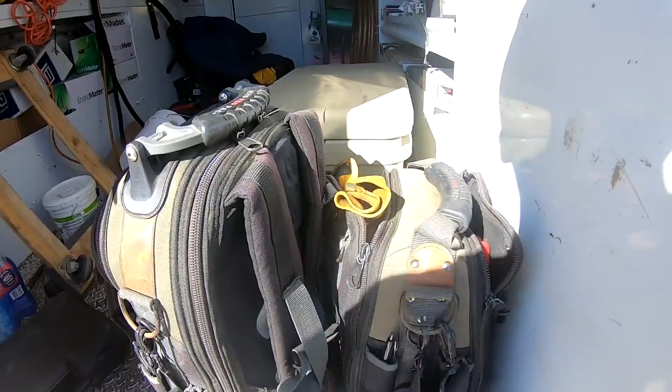All right, so I got a no cooling call. It's about 70 degrees out here today. They say the other day when it was about 80 degrees, it was 80 degrees in the house. So it's 71 in the house now, so I lowered the thermostat to 66. So I'm just gonna take a peek in the attic first.

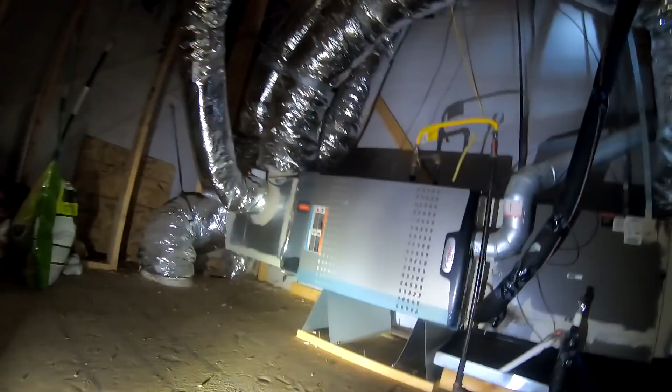They got a zone system. I turned both of them on to 66. I see zone 2 is calling for it.

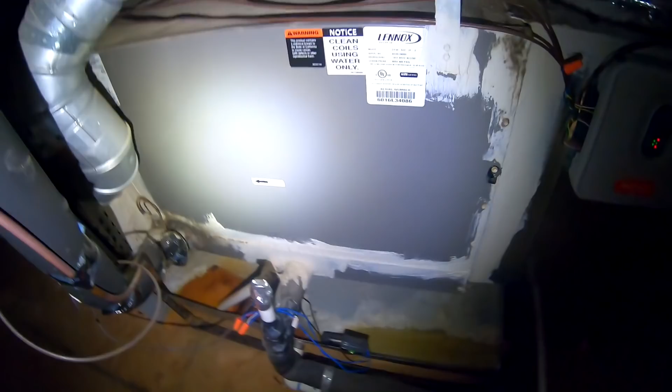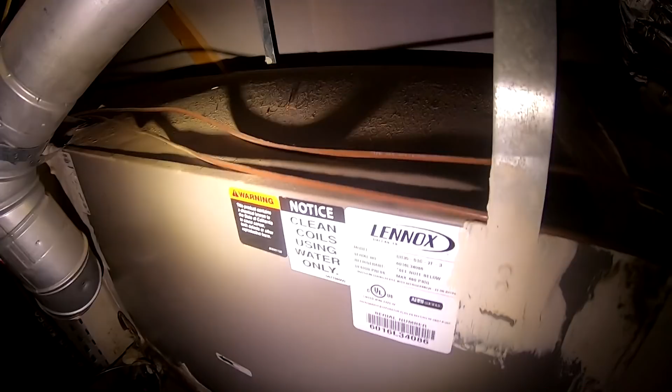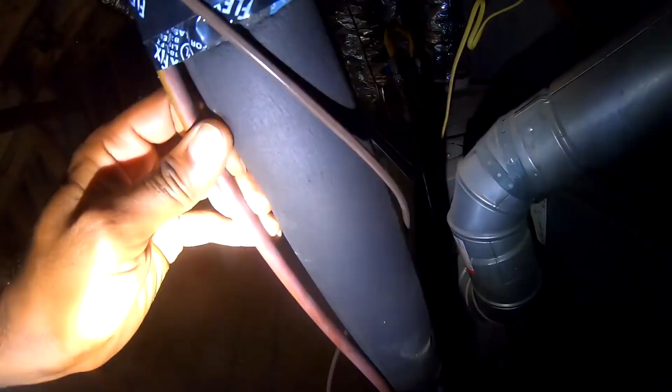Still a back order on these Lennox coils. I don't know if this is oil or water, a mixture of both. This liquid line is kind of cool. Damper is open. So I'm gonna go out to the condenser and hook up some gauges. I don't really see anything up here.

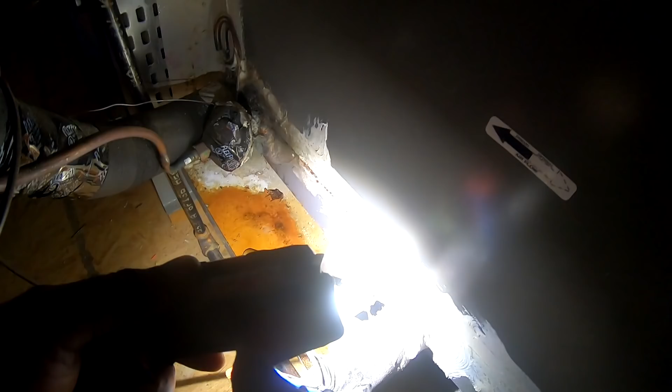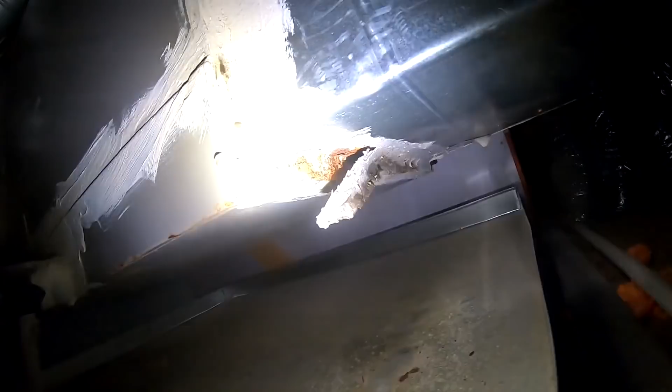But it's funny how the water is over on this side of the pan, but that side of the pan where the secondary line is, is dry. Go hook up some gauges. They got some kind of fence around this thing. There we go.

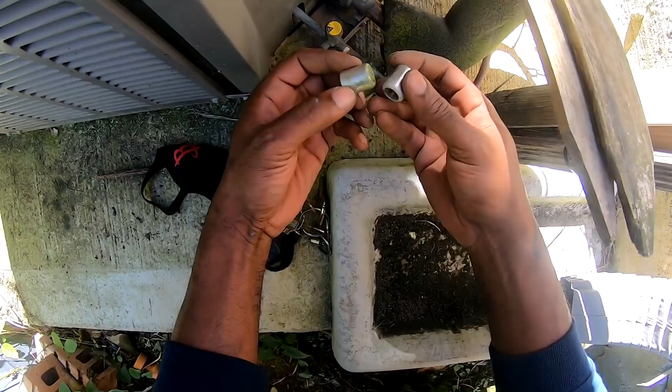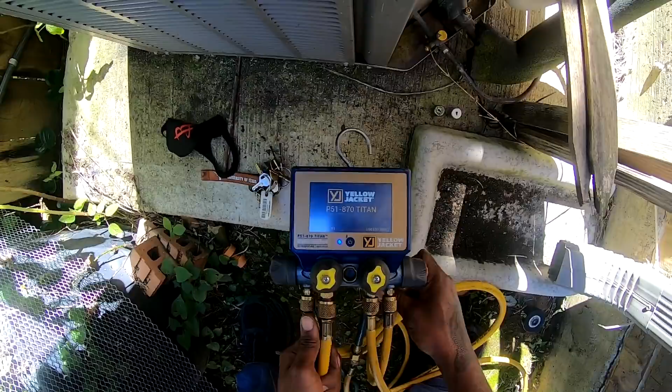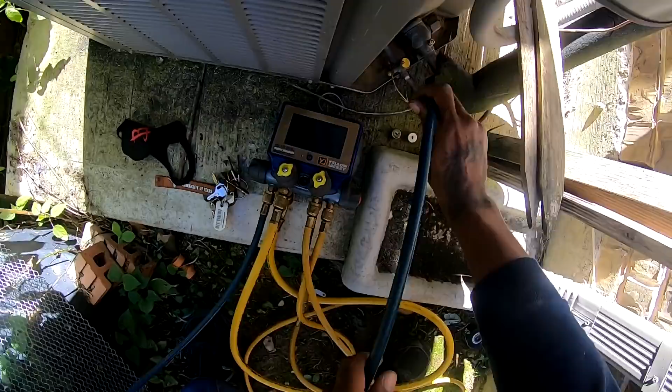I hate these locking caps. There we go. I rarely come across them, but I do come across them. I guess if I did it every day, it'd be a little easier. Battery low on these gauges. I need to get the other one. Let me try to get my other gauge.

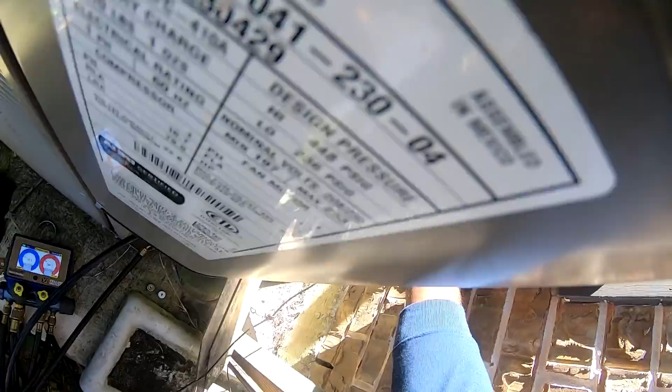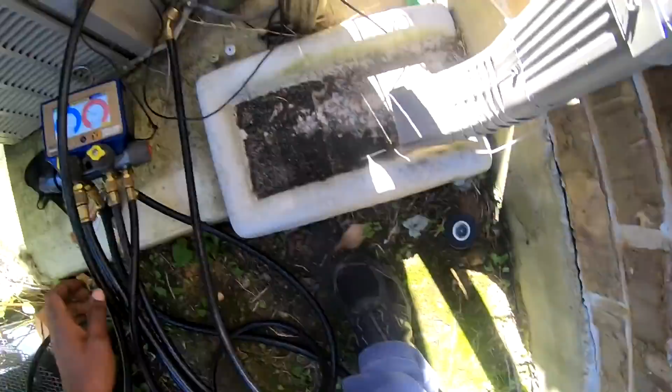Y'all gonna have high superheat. Yeah, 63-degree superheat. So it's low on refrigerant. There's oil in that pan, so I know that coil is leaking. And with these Lennox units, looks like it's 2014, so it may not be under warranty.

I still got a Lennox coil that I'm waiting on from the factory. It's a back order. I've been waiting on one coil. It's supposed to be here in like December, and it's been about 8 weeks. Looks like they could stand a cleaning also. But 9 times out of 10, I'm gonna charge it up and hopefully they got that coil in stock.

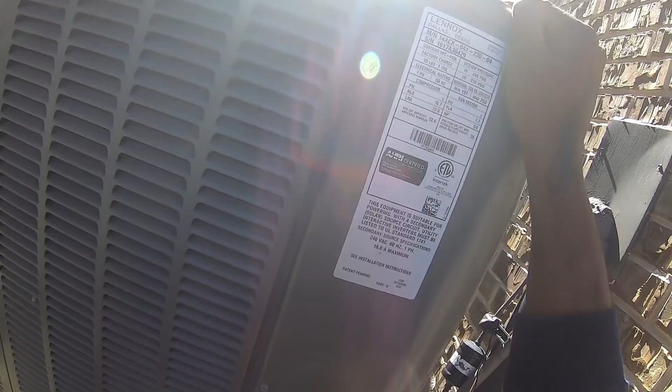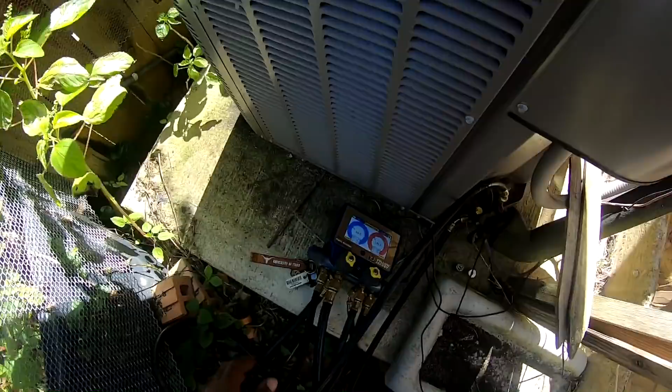But I'm gonna go up there and do a leak search on it. Maybe it's something I can fix, but I doubt it. I'm gonna get the leak detector, do a leak search on it, and charge it up so they can have some kind of cooling until we can get that coil replaced, if it's the coil anyway. I got 60 over 187. This is 410A.

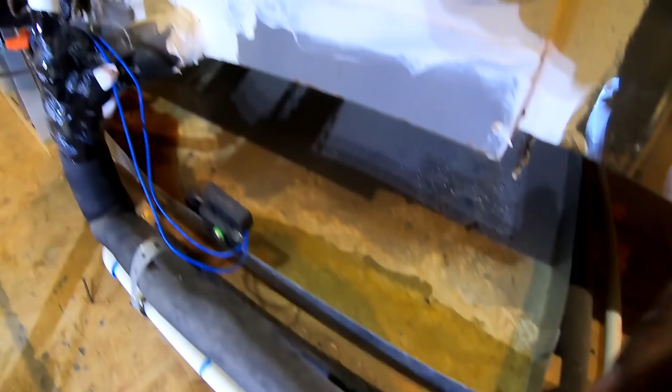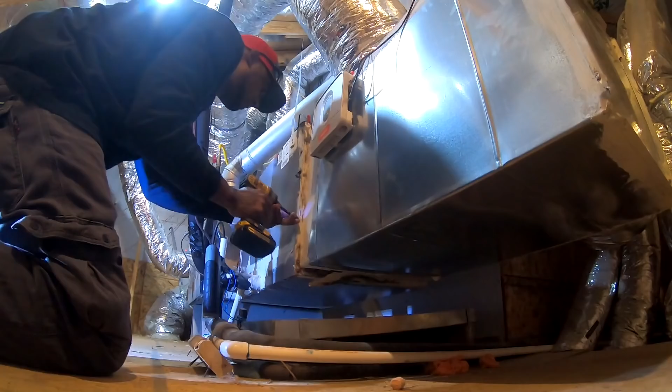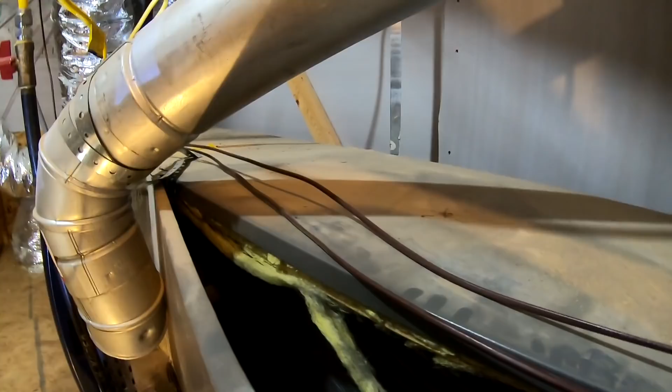All right, but this is definitely oil in the pan. So the TXV is on the outside, so I know it's not leaking at the TXV, so the coil's gonna have to be replaced. Seems like they put that black rubber coating stuff around the capillary tube, but it still always leaks around there.

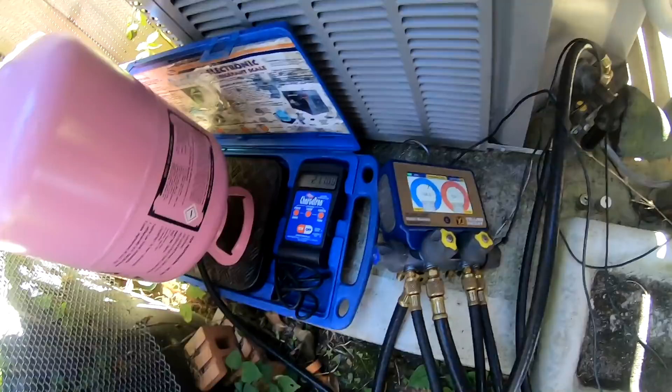Alright, so I got this purged. I'm gonna zero this out. Like I said, I spoke with the homeowner. These coils are back ordered, but I'm gonna get them charged up, and hopefully this will last until it comes in. But like I say, some of them been out several weeks, some of them been out several months.

So we can either do that, or I can put a Trane coil in for them. But it's gonna start cooling down, so they may just wanna wait and go back with the same brand. And I don't mind, 'cause I can just slide that coil in and out.

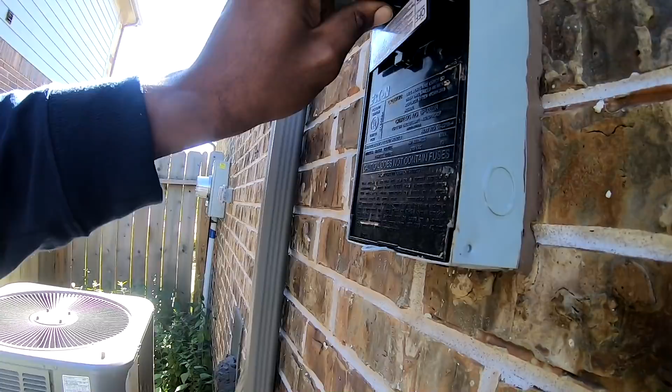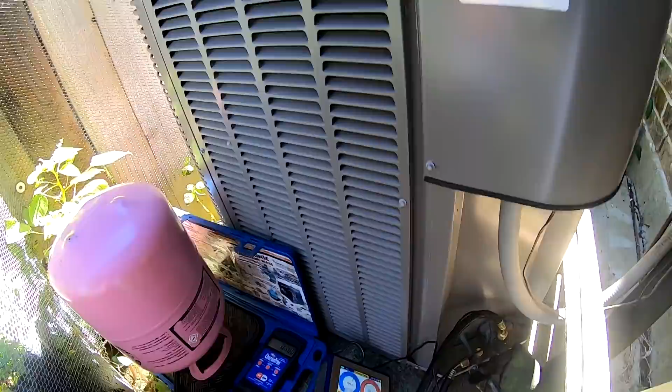All right, so I turned the furnace off, and I turned it back on, but it's probably got a delay on it, so I'm gonna wait about 5 minutes. All right, see if we can get it charged up.

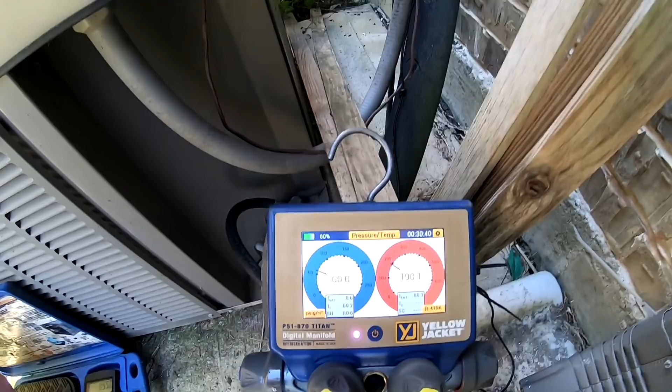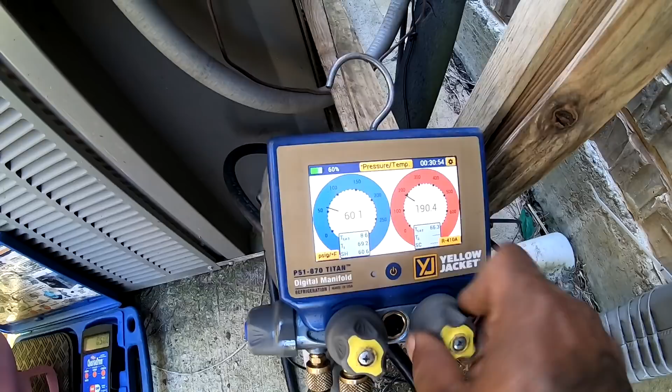Like I say, Lennox, they're killing me on the coils right now, but I can say Lennox coils lasted the longest, but now they just got a shortage, and I got 2 customers waiting on coils right now. Really, the only reason I'm waiting on them is because the coils are under warranty, so the homeowner don't want a different coil. But this one here is gonna be back ordered also.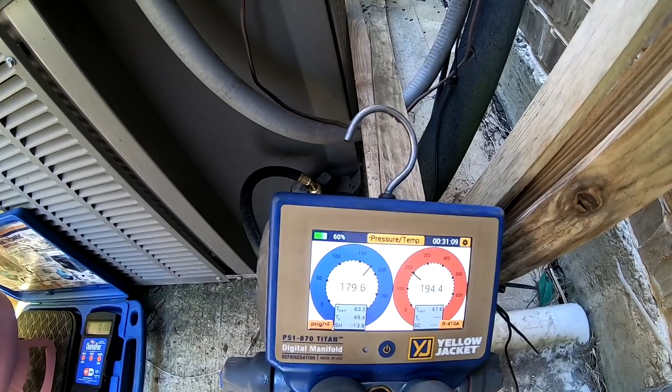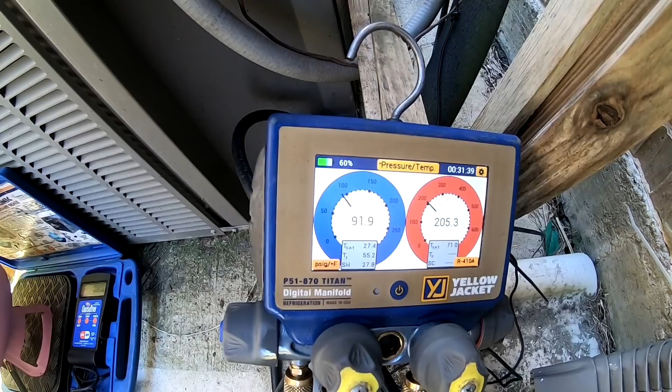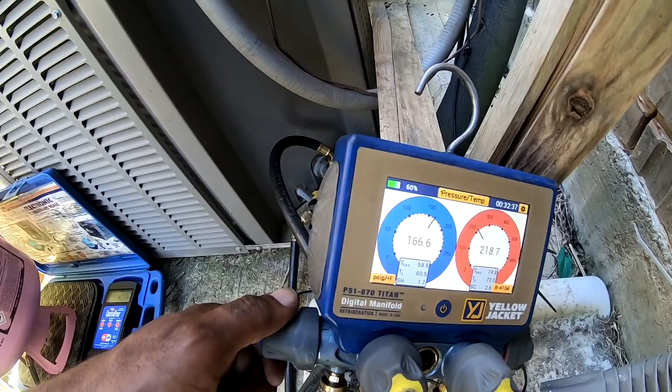At least it's not flat though, but it is low. See how low it is. I'm just gonna use a rule of thumb as far as my subcooling, since we know we got a leak. So if I get that subcooling between maybe 6 and 10, I'm fine with that. .6 pounds. System holds 10 pounds. Sometimes you get lucky though, and this refrigerant lasts a couple months.

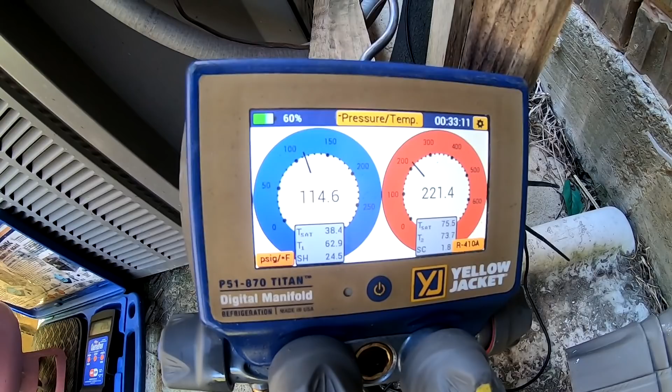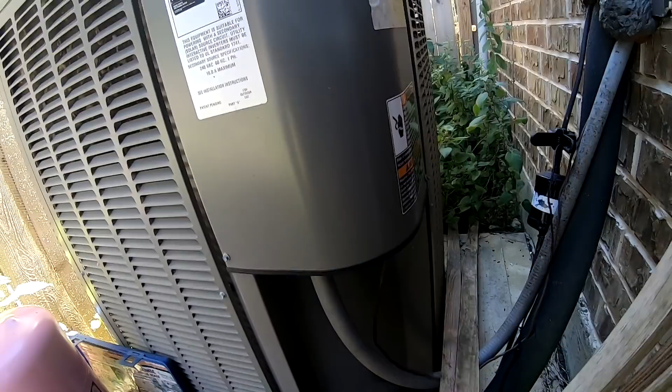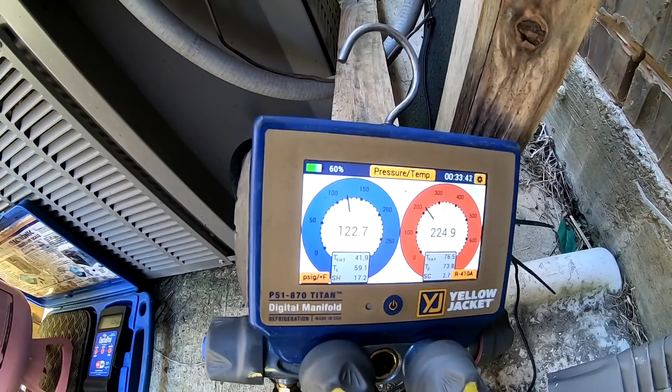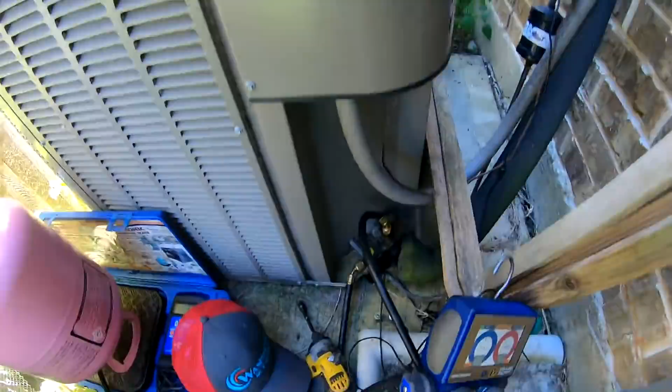I think my superheat was like 60 something when I first hooked up to it. I'm gonna open the panel up and take a look at that pressure temperature chart. Run to the truck, let that marinate about 5 minutes. So it's about 71 degrees. Sticky stuff off here. So it's about 70 degrees in the shade over here.

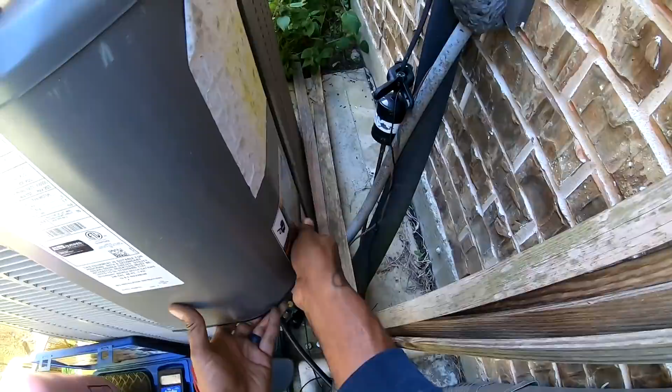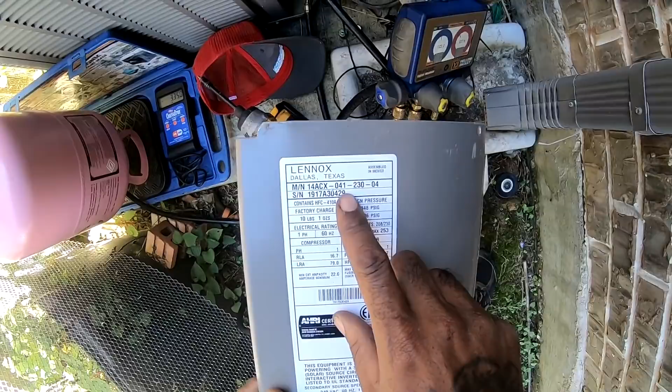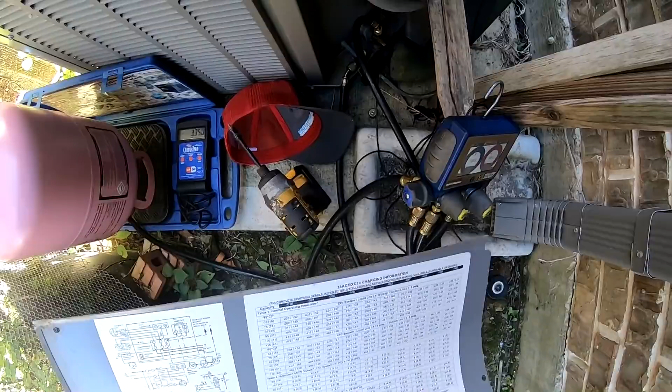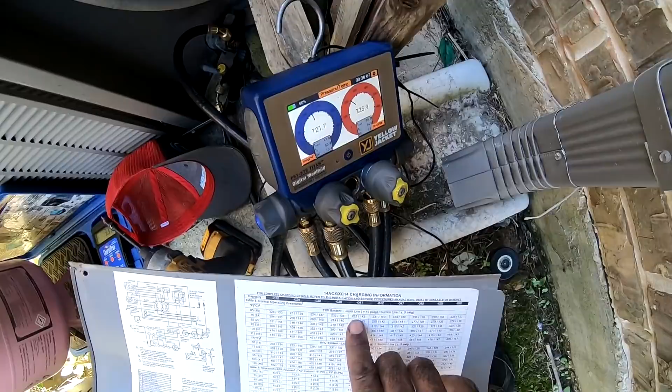Got here. This is about 3.5 at 41. So they want our pressures between 65 and 75. I'm gonna say between 138 and 235. I'm almost there. I'm at 122 and 225. So that's pretty good there. They say plus or minus 10 psi, so that's pretty much dead on.

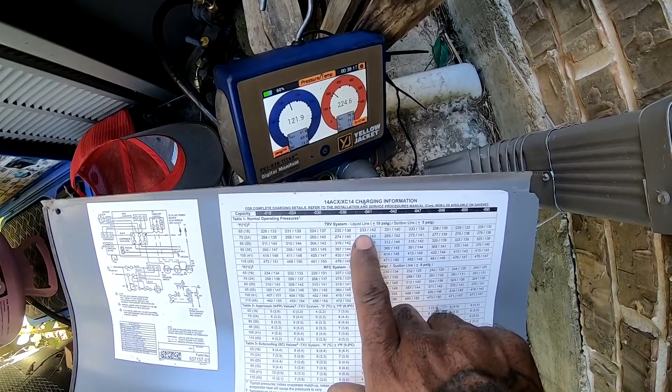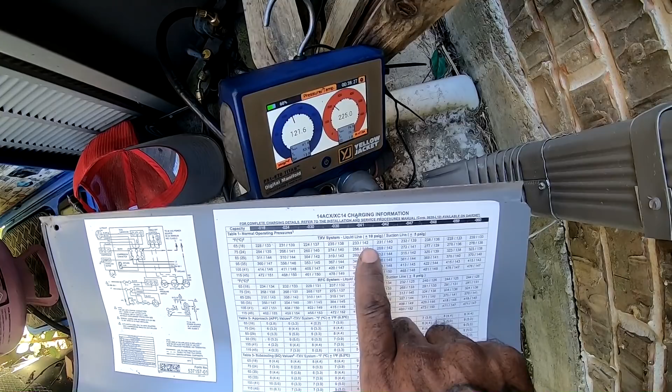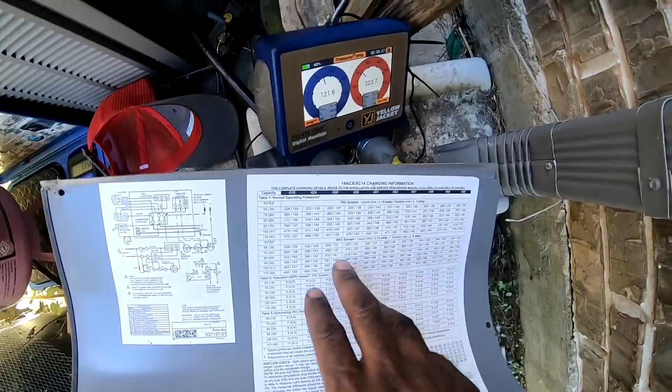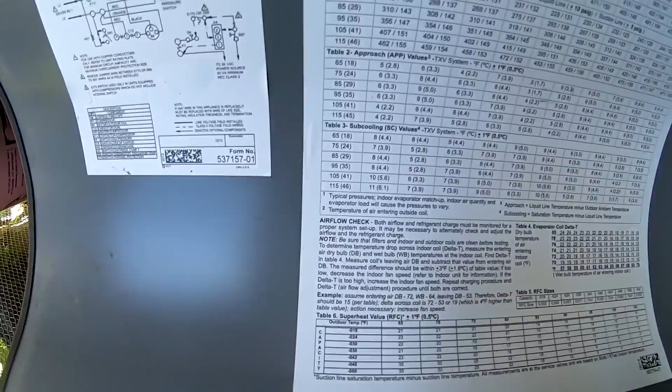And at 70 degrees, at 233, probably about 240. I'm gonna say about 240. Suction 143 or 142, plus or minus. So we're a little low. That's just the pressure with the TXV, normal operating pressure. Subcooling values between 65 and 75. So subcooling should be about 8.

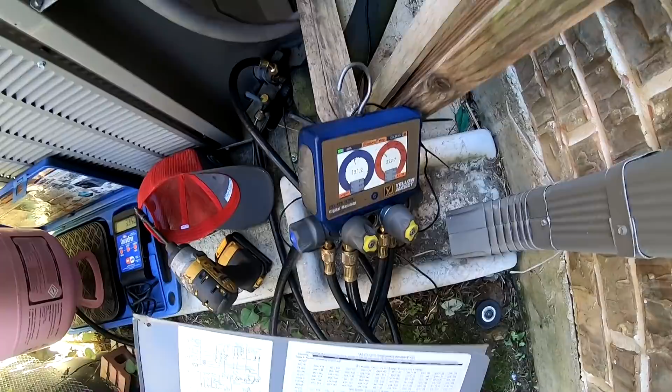You can see that. Follow the 41 down. Subcooling should be about 8. See, I'm still low on the subcooling, so I'm just gonna add a little more. Like I say, I don't have to get a perfect charge on there. I got 3.5 in there now. Probably put about 4 pounds in there, and that should do it. That's 4 pounds right there.

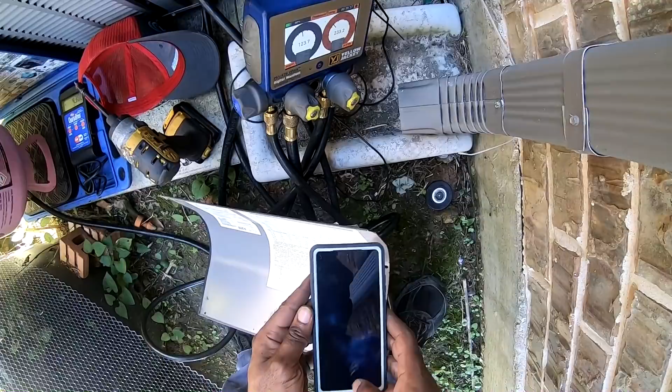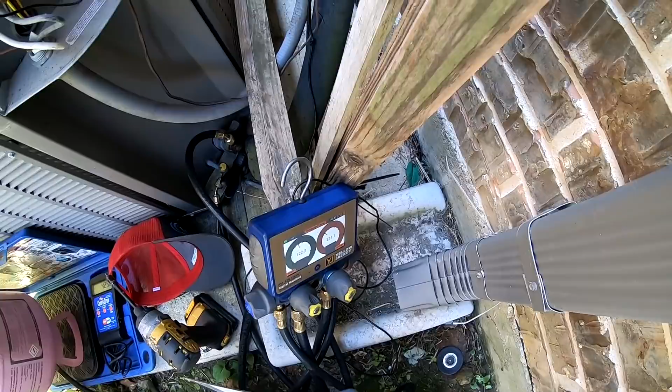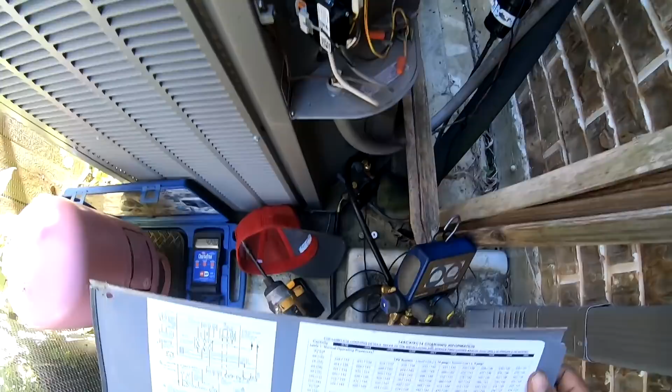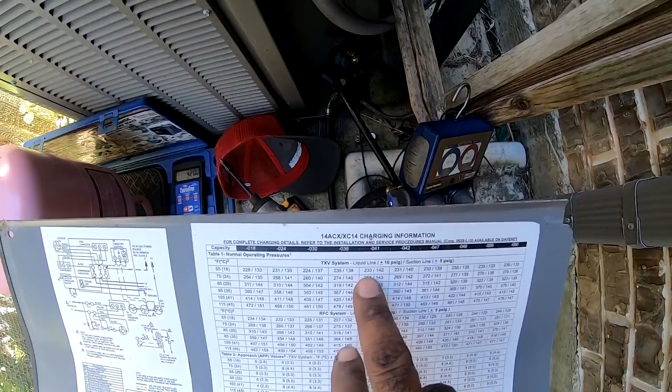Pull up the app. Anyway, I'm gonna keep it right there. I'm at 122 and 232. At 232 on this one. Like I say, between 233 and 256. I don't know how well you can see that, but we're in between there, plus or minus 10. All right, so I'm calling it good.